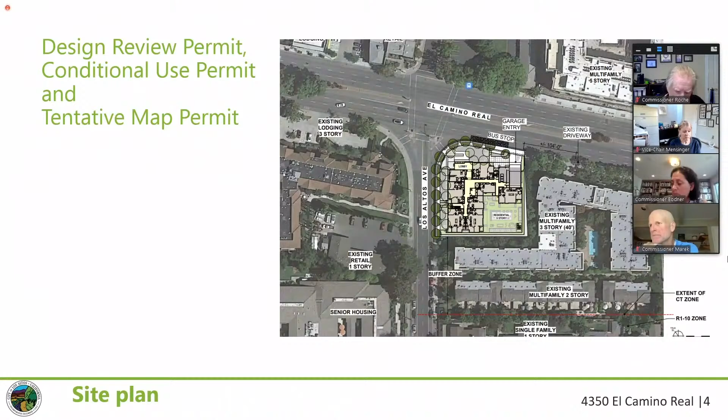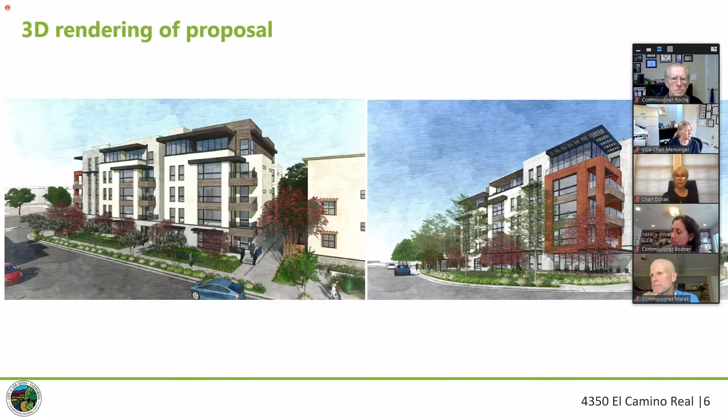The proposal is for a new multifamily residential development. It consists of 47 for-sale condominium units. It is proposed at 53.85 feet tall, 5 stories above ground, and 2 levels of underground parking spaces. The project is providing 7 affordable housing units to the below market rate housing mix.

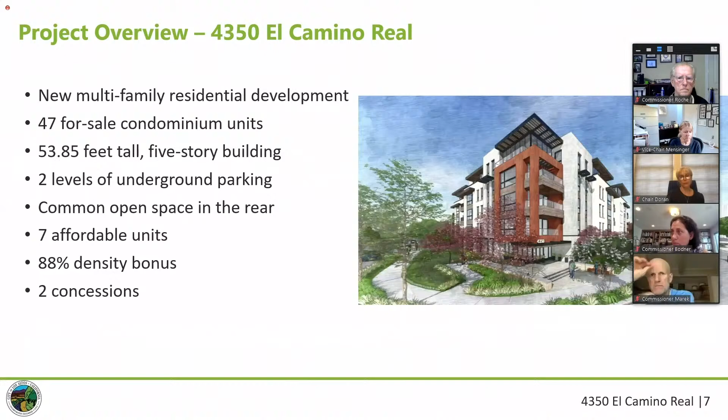It seeks an 88% density bonus along with 2 concessions. The project is an L-shaped building towards El Camino and Los Altos with an open-to-sky courtyard in the rear. The revised proposal includes a rooftop open space amenity at the corner of El Camino and Los Altos, at the building corner.

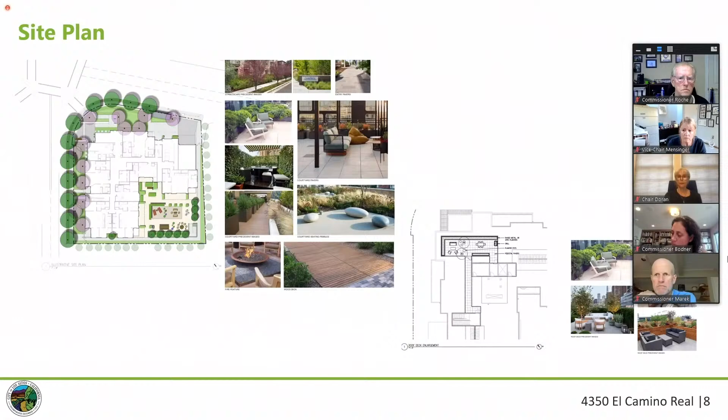To give an overview of the discussion from the April 7th public hearing, the Planning Commission addressed and gave specific direction to the applicant to address the design review deficiencies pointed out in the April 7th staff report, pages 13 through 19, and also to address the density bonus deficiencies. There was a list of design review deficiencies that needed to be addressed in order for staff to make findings for approval. The design was required to improve and allow for more articulation and distinguishing of the project proposal.

The feedback from the Planning Commission included reduction of the bulk and mass, addition of detailing of a railing typology, and also to redesign based on the guidelines available in the objective design standards for a better product. In May, the applicant resubmitted a new design, which we see tonight, and this addresses the deficiencies substantially, presenting a much improved product. The applicant's architect will speak more on these design changes after my presentation.

I will be going into details about the density bonus deficiencies that were discussed. There was a lack of equitable distribution amongst the unit types across the project as it came to us on April 7th. The BMR unit did not include a 3-bedroom type at that point, and the distribution was not across all the floors. However, the revised design provided to staff makes some favorable changes to the below market units, and I will go into it in detail.

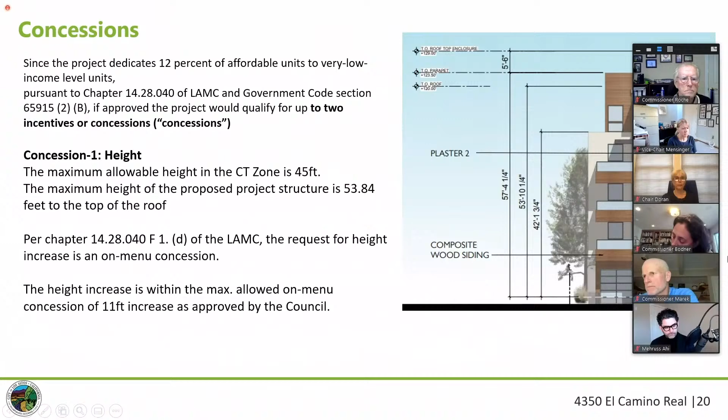Because they dedicate 12% of affordable housing units to very low income, it would qualify for up to 2 incentives or concessions. The first one is the on-menu concession for height increase, which is something we discussed in detail last time, and it is supportable.

And the next one would be the parking aisle reduction. The traffic analysis clarifies that allowing a reduced parking aisle from 26 to 24 feet would allow for a more economical parking garage by reducing the overall dimension, and it doesn't impact the project vastly, so it is supportable.

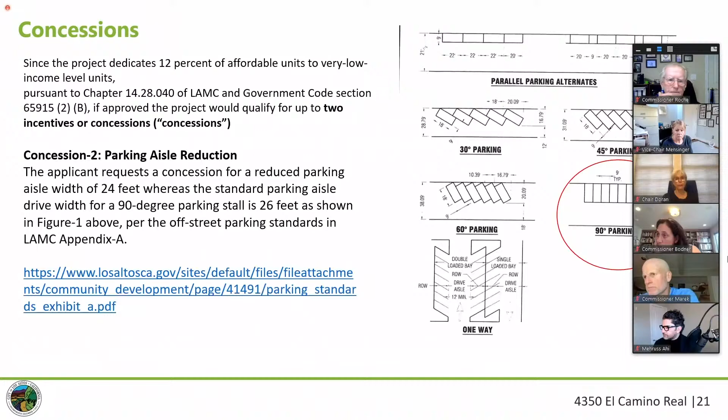A notice of intent has been adopted to adopt the initial study, and the mitigated negative declaration was circulated in January through February. The city received 2 comments, but they did not raise any significant information to substantiate a warrant for new recirculation of this project's MND. The city council will review it and consider the comments and responses before they can make a decision to adopt this notice of intent.

Overall, staff recommends that the project be approved with the recommended conditional change to the BMR unit mix as detailed in condition of approval number 2 of this report. And staff recommends approval of the design review permit, CUP, and subdivision per attachment A resolution and findings.

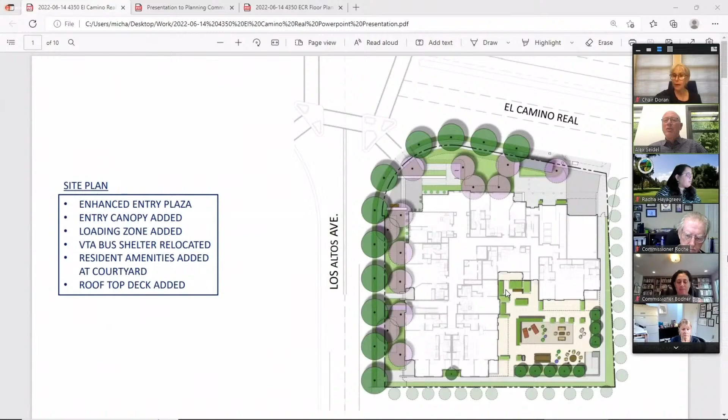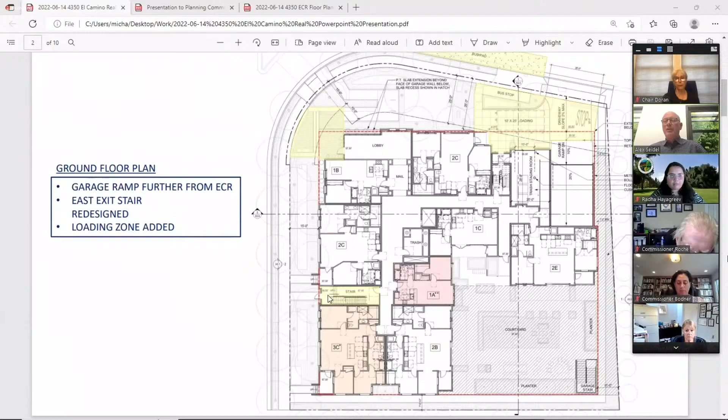This is a little bit of a close-up of the areas I just mentioned, highlighted in yellow: the entry plaza, the vehicular area with the truck loading and bus stop, and an additional element in the lower left, the yellow highlighted stair area, which I'm going to refer to as we move through the presentation.

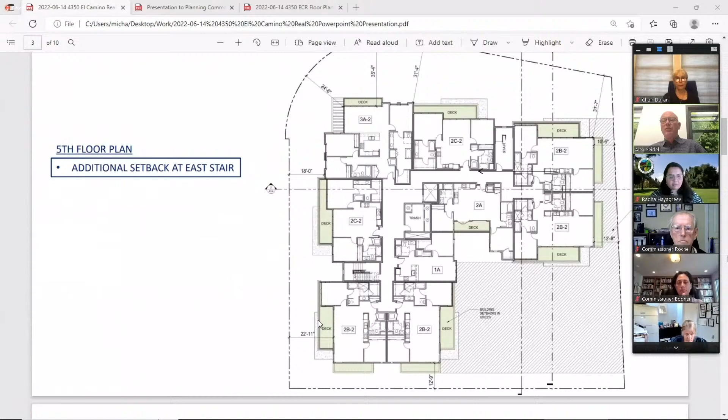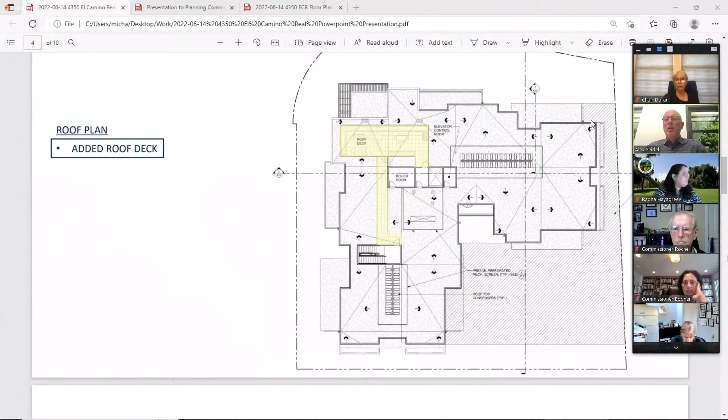This is the roof plan. The yellow area represents the added resident amenity of a roof deck. It's placed far away from any of the adjacent residences, close to the corner of Los Altos and ECR. One other thing I'd point out: if you're able to see the parapet line, we jogged the parapets around the building to give additional interest and breakup to the top line of the building. There's an element of your code now that says nothing should be longer than 25 feet, so we've been trying to follow that.

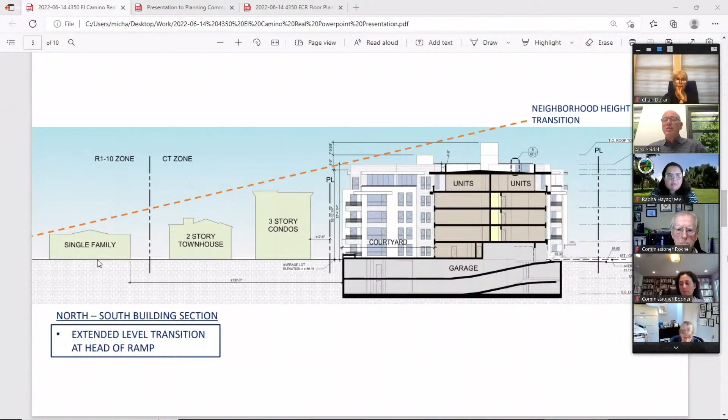In addition to the bigger scale moves, we've worked on a lot of the architectural detailing. We really wanted to emphasize the base, body, and top of the building, consistent with your more contemporary code. In terms of the details, we've recessed the windows and added projected precast sills at the windows. We revised our previous proposal of vinyl windows and are now specifying metal windows. We have a projected belt course at the base, so we're really trying to emphasize that stone base. We moved some materials around.

We also designed a single garage entry. That was a comment that came up in the commission. We think that is good for the convenience of entering and exiting. And the material colors are overall lightened.

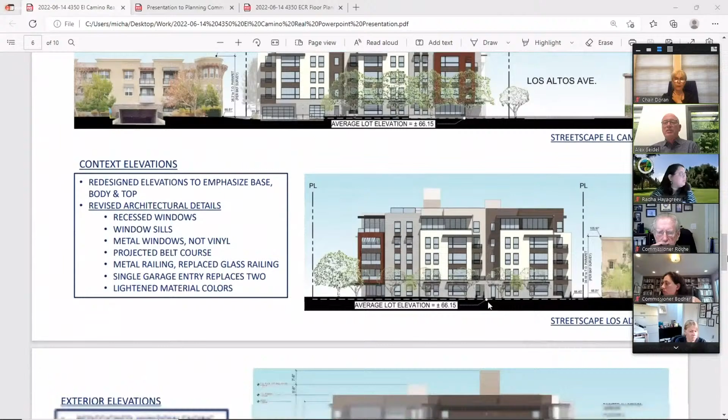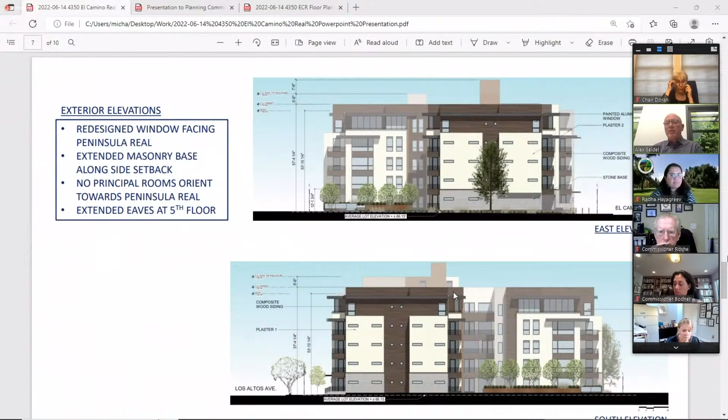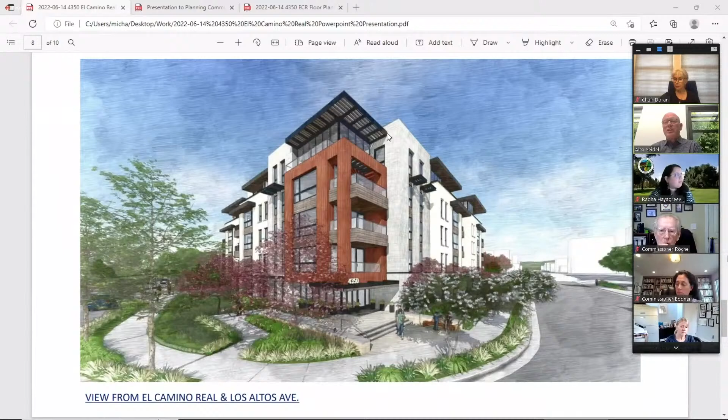A couple of three-dimensional renderings. This is the entry plaza that I referred to, and you can see the entry canopy and the address signage added. There's some additional planting, and we added a bench down in the lower level below the steps. And if you go to the top of the building, we redesigned this projecting element. It's now an open air element, metal with wood, so you can actually look up through it and see the sky. We lowered the parapets in that area to reduce the massing. And you can also get a sense of the recessed windows as you move down along the two street frontages.

And then finally, right in the middle is where that stair used to project up above the parapet, and you can see it's been recessed way into the building, so it doesn't play a prominent role in this view anymore.

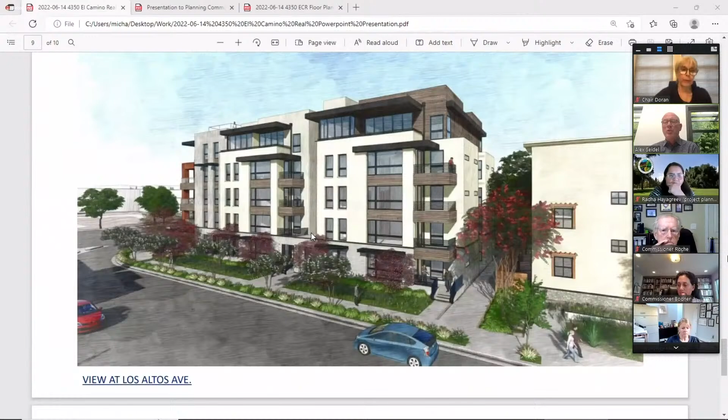With that, I would like to pass the baton to David Cornfield. He's going to talk a little bit about the affordable units.

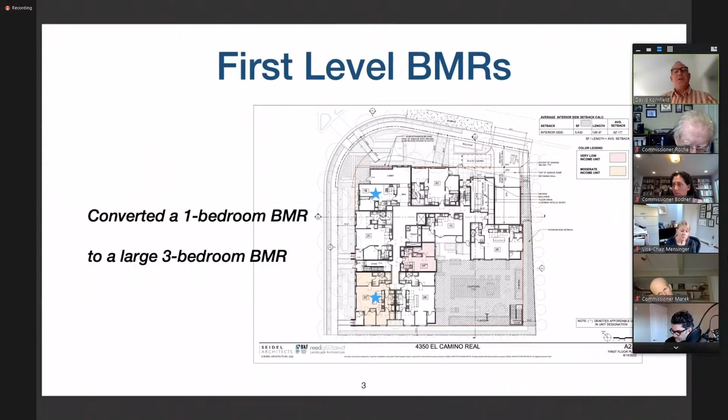In terms of the first level, on the lower left there, where the blue star is, that's the new 3-bedroom. Not only is it one of the largest 3-bedroom units in the project, it's also a walk-up unit, and that's very, very desirable. On the second level, we kept those the same, the 2 BMRs there, a 1 and a 2-bedroom.

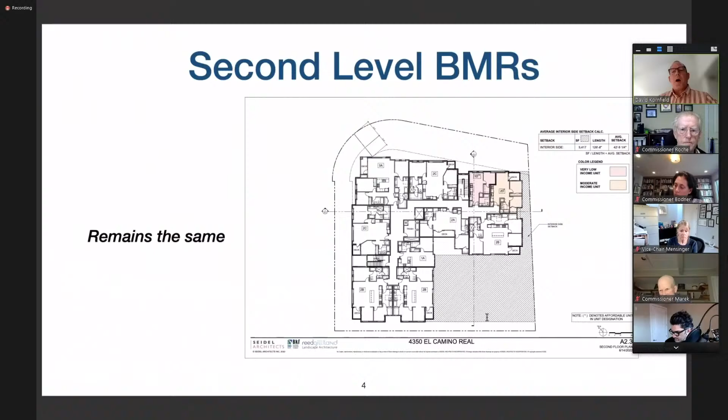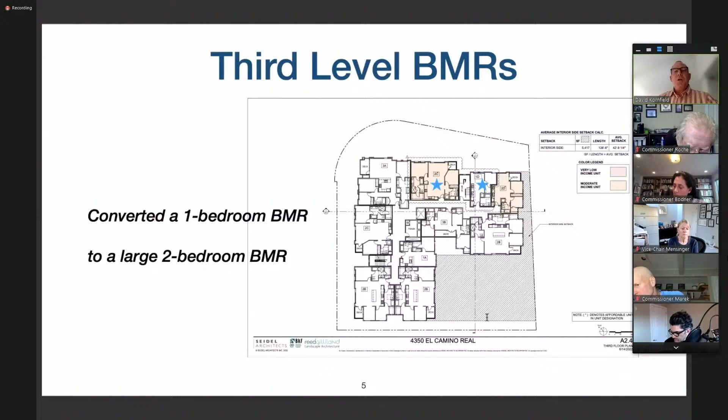On the third level, we converted a 1-bedroom to a 2-bedroom there, and you can see the change. On the 4th level, we converted the 1-bedroom to a 2-bedroom, and they're really adjacent to each other. The original location's not shown there.

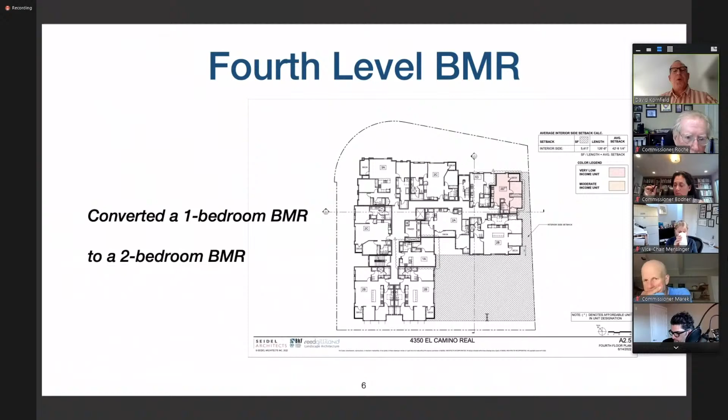So with that, I'm concluding with, we had three concerns about the conditions of approval, and we really appreciate staff's work to clean up the resolution and clarify some conditions with this revision of the report. However, we're concerned about condition number 27.

We think that just needs a phrase added to it, that these are items that the plan shall include, because this condition number 27 is prior to the building permit, so they can't be accomplished. They're just going to be call-outs on the plan, and we wanted to make that clear.

In condition number 27.6, we appreciate the revision to refer to the bench or custom enclosure that VTA has approved us to do there, but there's an errant sentence that we think should be removed. There's a sentence that starts with replace the existing shelter with a new VTA standard shelter with the full back ad panel. And that's actually our concern. We would like to do a better custom enclosure there, or the bench. So we think that's a confusing sentence to have in there with what VTA has approved.